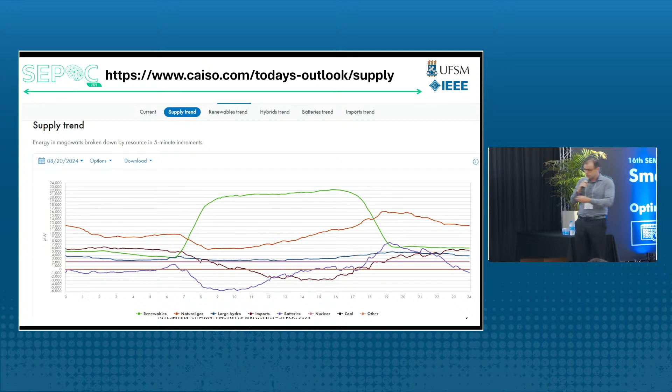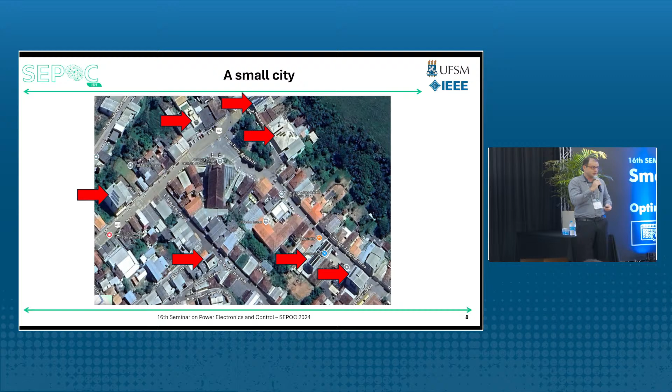What does this mean for us? General electrical engineering guys don't work with solar panels. They work with power electronics converters. But if you have a solar panel, this means that you have an inverter there. You have a power electronic device there. And this is in Santa Maria, in my city, in all the cities of Brazil; you can find a lot of solar panels. This means that we have a lot of power electronics converters spread around Brazil. And this is very good for us, because we can start to think about this.

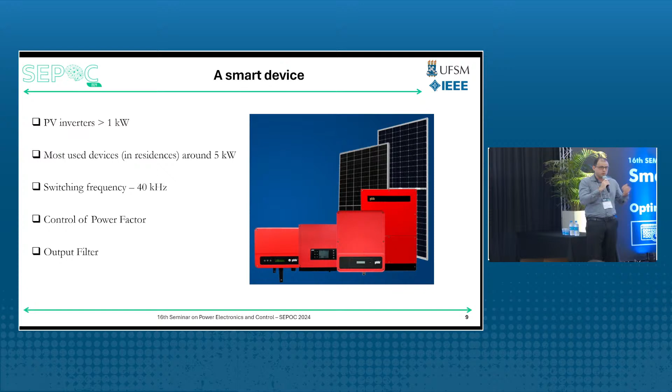And this device works at very high frequency compared with the traditional power system, because our grid is 60 hertz, and the device is switching at 40 kilohertz. So this means a lot of things for us that I'd like to introduce here today, if you don't work on this topic. And the control generally works with a power factor equal to 1, or very close to 1. And this is the most important thing there: you have a power factor control, and you have an active power control that is controlling how much energy you can extract from the PV panels.

And inside this converter, I take an example of a small one that has two stages, a DC-DC stage and a DC-AC stage. And inside this, there are the main characteristics: the MPPT, VDC control, protections, synchronization. For all of the converters, here in Santa Maria you have a laboratory that can certify this type of test. It's very amazing there. I went today with Professor Lucas.

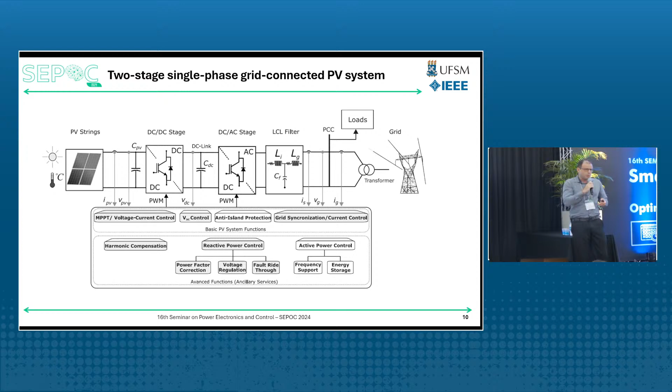And also, you can do other things. You can do harmonic compensation, reactive power control, active power control. Today, we cannot do active power control because most of the systems don't have a battery connected together with the inverter. But in the future, maybe in 5 years, most of them will start to have the opportunity to also connect a battery. Of course, there are many opportunities to buy this type of device, but it's not the best seller today.

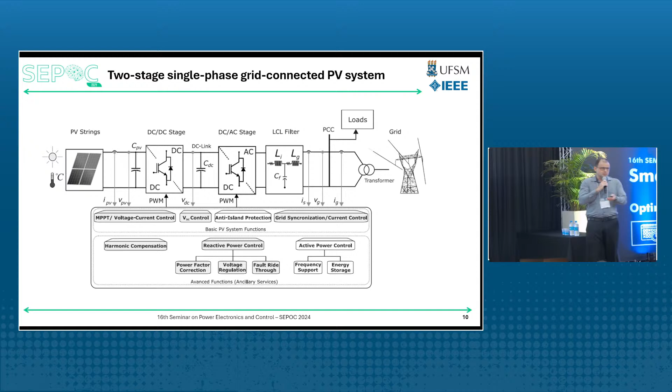So I'd like to do a joke with you. If you don't work with power electronics, I will ask the guys here, please, to play the first music.

So thank you for the first video. And now, we have Professor Lucas who is a pianist, so he can listen very well. I don't know if all of you can play this, but this guy plays. I cannot play what he did. So I'm not saying that he plays bad. I cannot do what he does. I don't understand anything about music. And this works very well.

You can listen to the music. You can see what song it is. It's a very beautiful song. Okay, it's working. You can use this type of device to play songs. But now I'd like to show you another device that also plays songs. So please put the second video.

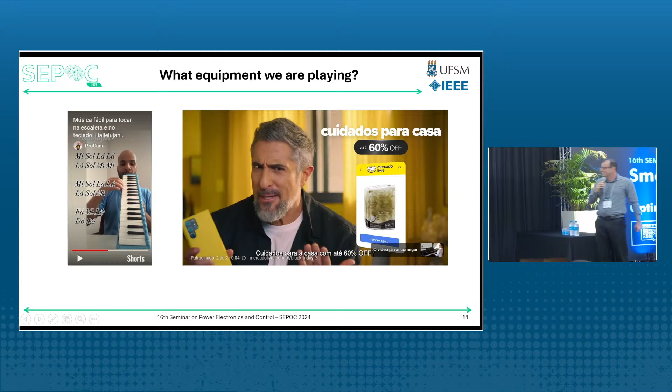It's the same song. I think that's okay. It's okay. Why do I show these two songs to you? Both are playing the same song. So if you understand music, you know that all of these are frequencies. So the notes, they have frequencies. So if you'd like to play a song, you need to understand the frequencies.

But the quality of the device can change the way that it impacts people. So when we have a power electronic device, we are talking about a very nice device. And which type of song are we playing today? I don't like to say bad things about the power devices today, because they do the job. They are doing very well. But I'd like to say that for the future, we can continue playing the same device, or we can change the device a bit and improve the song.

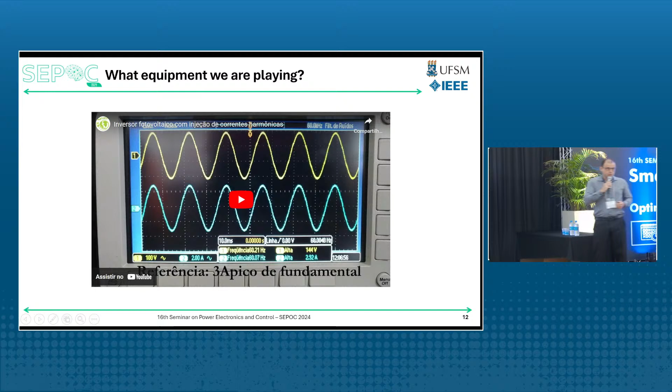So next slide, let me put it here. So this one we did in our laboratory in GESEP. So if you can play, please.

Okay. So we take a commercial power device from PHB Brazil, and we change the software of the device, and we are controlling the current, 2 amps, 3 amps of fundamental, 4 amps. And now we start to put in a third harmonic. So we are asking the device to inject a third harmonic, increase this one. After we put fundamental plus third harmonic, increase the third harmonic, so you can see that the waveform is very bad now. Increase a bit more.

So we change the frequency. We change the way that the device is playing. And we can do this. We didn't change anything in the converter. We only changed the software. So it's the same current sensor, the same voltage sensor, the same processor. And we changed the song that was playing there. Most of us cannot hear 60 hertz or 300 hertz, but it's a frequency. So let me show, can I?

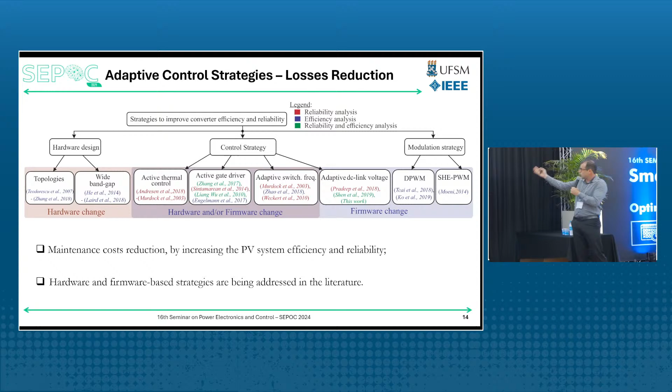So the first thing that I'd like to show you is about improving the losses. So many people like to reduce the losses. And how can we do this? There are a lot of ways to do this. We can change the hardware. We can change the hardware and the firmware. We can change only the firmware.

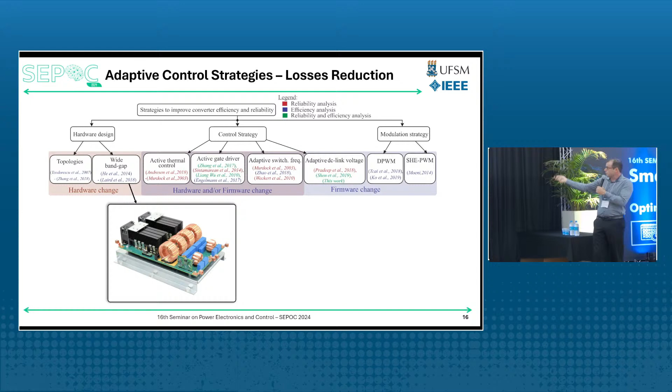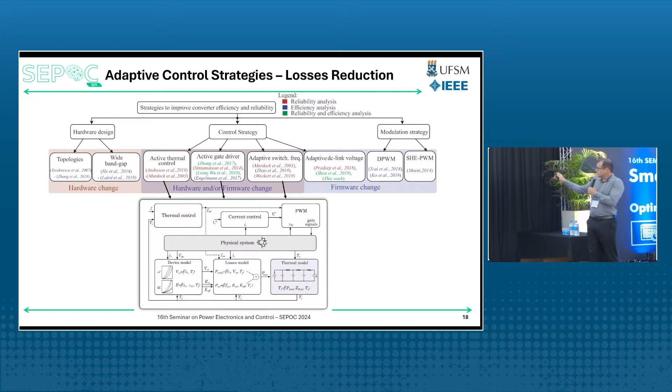So here there are some topologies that you can try. What's the best one? You can try wide band gap devices. You can change the modulation to a discontinuous modulation. Also, you can change some characteristics of the thermal conditions. And we are proposing the first part here. Why can't we change the DC voltage of the converter? Because why do you need a DC bus in the converter? Because you'd like to inject current into the grid.

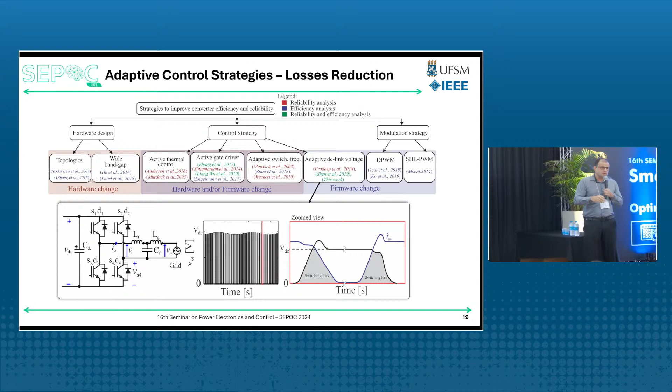But if the current is very small, for example, in the beginning of the day, you don't have a lot of sun. So the current that you are injecting is very small. In the beginning and in the end of the day, the current is very small. So why can't you change the voltage reference? Why would we like to change the voltage reference? Because the switching losses are related to the DC voltage. So if you reduce the DC voltage, when you are switching, you are reducing the losses. So this was the strategy behind this.

Here there is a small equation to show the voltage that you'd like to synthesize using the converter. Of course, that is impacted by the impedance of the grid, the output impedance of the converter, and the grid voltage. So in the first case, the grid voltage is V0, and you need to synthesize Vs.

If, for example, the grid voltage increases, and this can happen and it's normal, for example a 10% increase in some conditions, at least in rural areas it is very common for the voltage to vary during the day. So if the grid voltage increases, you also need to increase your synthesized voltage. In this situation, you need to increase your DC bus.

This way, you need to look at the standards. What is the worst case? Because when the grid voltage goes down, it's better, because you can reduce the DC link a little more. But you need to consider that if the grid voltage decreases, maybe you need to increase the current to keep the power. So it's not so straightforward to analyze this way.

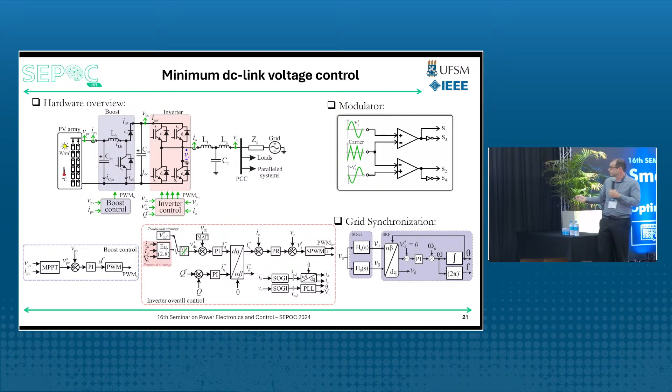Here there is another case where we create an index called k, where k can be equal to 1. If k is equal to 1, you are in the, let's say, traditional case. And if k is more than 1 or less than 1, you are doing an adaptive control.

And here is equation 2.8. I will not show how everything is calculated, but you can see that it depends on some parameters. Some of them are constant, like the grid frequency, the resistance and the inductance; they generally will not change. But the grid voltage and the currents ID and IQ that you are injecting will change during the day. Okay, so this was the first case.

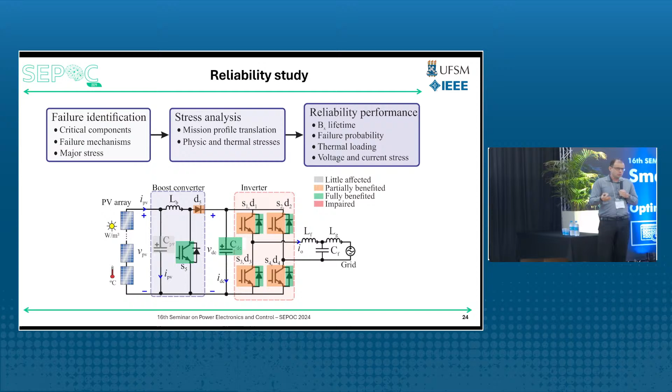And we wanted to understand: okay, I can do this, it works very well, but what is the impact on the lifetime of the converter? Will I increase or decrease the lifetime, because the voltage can decrease here in the DC bus? How will the elements, at least the semiconductors and the capacitors, feel this change? So we did a lot of tests. When we talk about lifetime, there are a lot of methodologies you can use during the study. So I will show you one of them.

But our group did a very good job, and they could implement the equation that I showed you, and in real time we can calculate the voltage that I want in the DC bus and control it. And here is a base case where in red we have the traditional one, and in blue our proposed strategy. As you can see, we made some modifications here. For example, we did a step of reactive power.

Why do I do this? Because I want to see how the control responds. Here it's a small step, because it's controlling the fixed current, but you can see that to inject reactive power into the system, I need a higher DC link. And whether it is inductive or capacitive, observe that the DC link can decrease a bit.

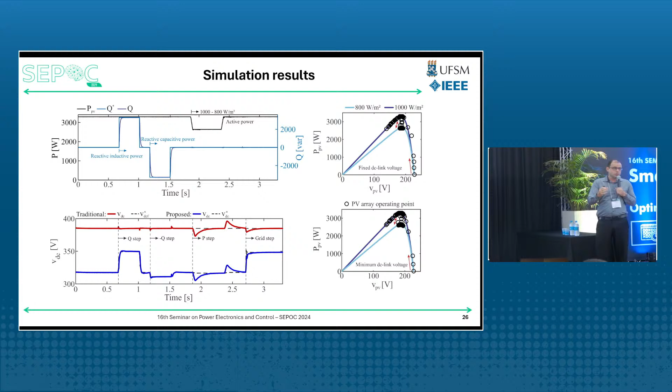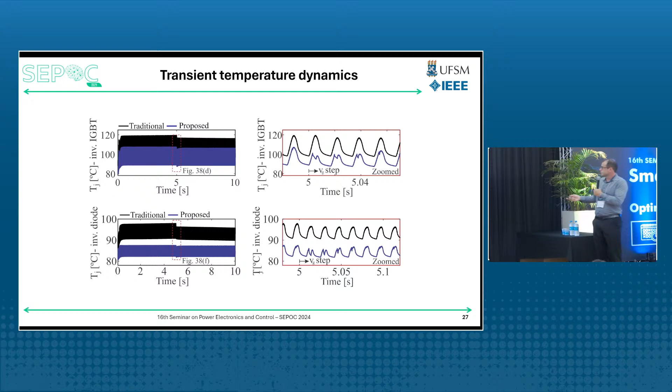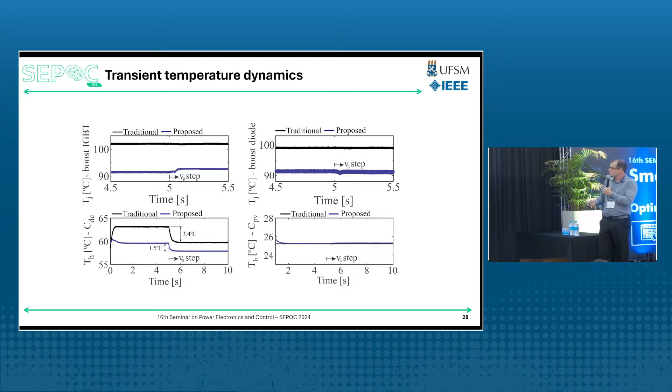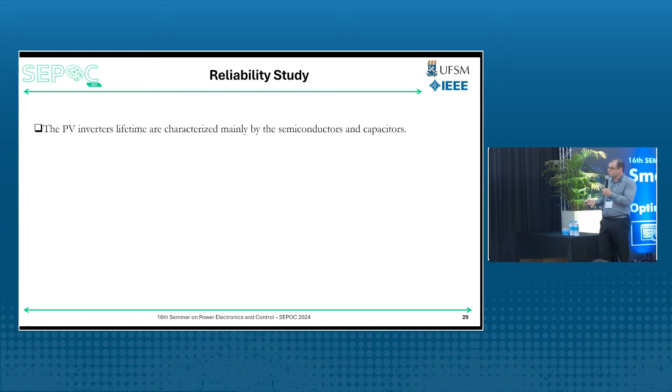The reliability study, the PV inverter lifetime are characterized mainly by the semiconductors and capacitors. So I will show you here a figure, a very traditional one, where what's the big failures that happen in a PV inverter? Are the power device and the capacitors. Of course there are other important failures like gate drives, but in this study we didn't have a methodology to understand how the gate drives will fail.

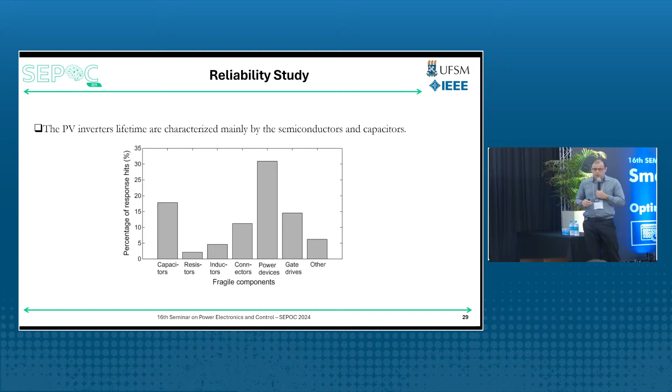But for the capacitor and for the power device, there is a lot of methodology that can be used in this direction. I don't like to spend a lot of time on how this is done. So there is some classical strategy where we need basically a mission profile. So the most important thing here to do this type of study is that you need a mission profile for ambient temperature, the solar irradiance, and grid voltage.

And also this means that depending on the solar irradiance and the temperature in the environment, maybe the same result done for Rio Grande do Sul can be totally different from Minas Gerais. Maybe inside the state, in one place you can have one result, in another city you can have different results. So it's not so easy to conclude based on reliability, but it gives you some ideas. Of course if you improve here, you will improve also in other places, but maybe not in the same magnitude.

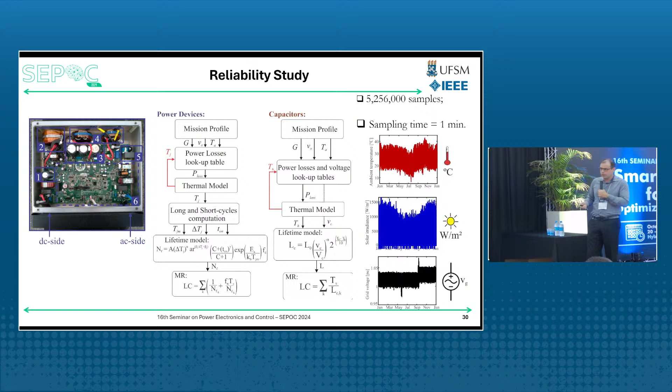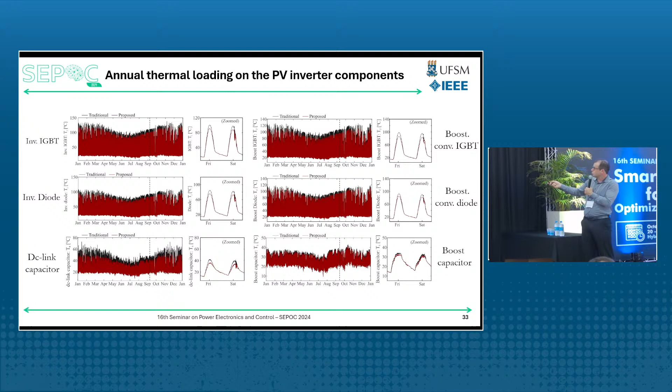So we create this type of power losses lookup tables, thermal model. We analyze long and short cycles. Also, after, we need to use a Monte Carlo simulation because inside the data sheet of the device, there are some parameters that can change 10%, 5%. So you can understand how this is done looking at the data sheet, and they will give you some directions on how much this power electronic device can change. And based on this, we can see the profile of current, or of temperature, in the IGBT, diode, DC link, everything.

And concluding this first part, here is the conclusion. Our proposed strategy can increase the lifetime B10 from 18.1 to 29.4 years. This is a methodology where the B10 says how much time it will take for 10% of the samples to fail. Of course we are not saying that the PV inverter will work for 29 years. At least for me, I don't look for this number and believe in this number, because this is a comparison between two things.

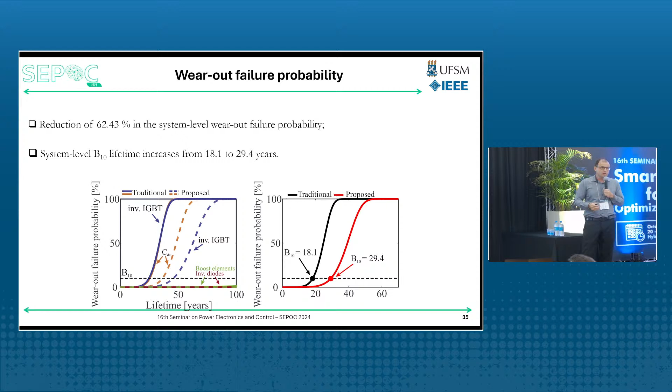There are a lot of other things that were not inserted here, like the gate drives, other steps that we didn't add in this study. But the good thing, in my way of thinking, is that you can see based on statistics, comparing both strategies with the same conditions, that using the proposed strategy, you can increase the lifetime of the power electronic device. Okay, so I finish here my first case.

Now I'd like to show you the second case, where we use this inverter to provide an ancillary service. This is a topic that is growing a lot nowadays because, like I showed you in the beginning, this device is very smart. So you can use it to do other things. And I will show in this next case the reactive power compensation.

The first question is, why would I like to do an ancillary service? For photovoltaic systems, I can answer you very easily. Because in general, in our case, for example, you have sun between 6 a.m. and 6 p.m. Maybe in one month or another, this can change a bit. This way, you have a power electronic device in your house or in the industry that is in standby mode approximately 70% of the time.

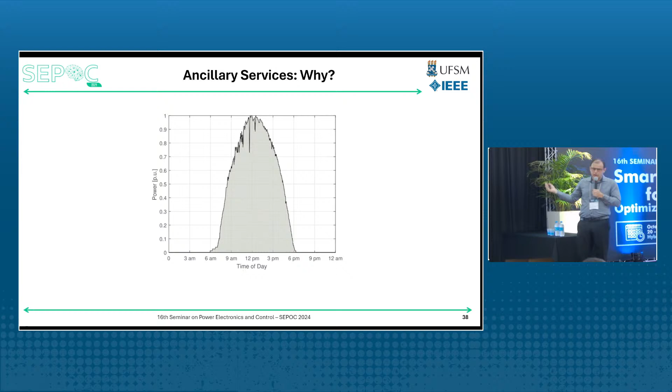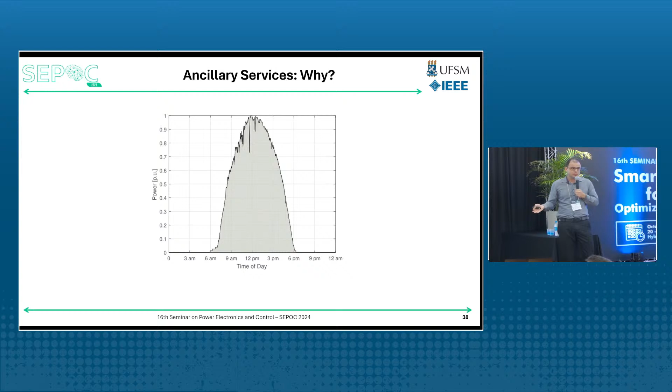Because in some parts of the day, you have a margin of power here that you are not using because there is not enough sun. In this case, we take the total area of the square and remove the area of the irradiance, and this area here is around 33%. So you have almost 70% of available power that can be used for other things.

So we choose the PV plant plus one industrial system. Why we choose this study case? Because, for example, for homes in Brazil, we don't pay for reactive power. You can take a lot of motors in your house with a power factor 0.8, and no one cares about that. But for the industry, they need to pay at the end of the month a quantity of the reactive power if it is below 0.92.

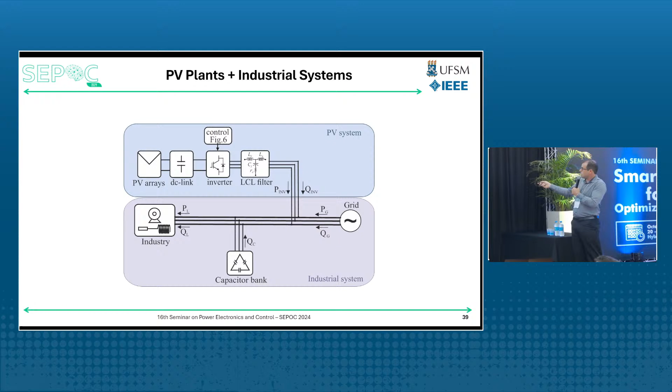And I like to show you other problems when you have a PV system. So here you have the industry with the generator, they have a lot of motors, and you add a PV system to decrease your bill, decrease your electricity bill. So many industries in Brazil did this. What they didn't know, because people didn't tell them, because many of the people that install PV systems didn't know about this.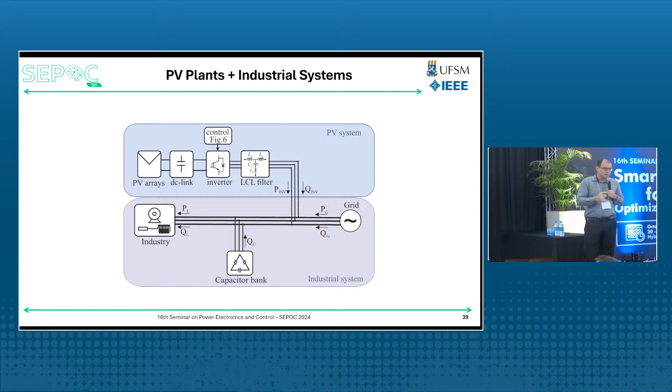In industries, they have a lot of capacitor banks. Why they use capacitor banks? To correct the power factor. What's the problem of capacitor banks? That they have steps. So they have some quantities that are defined, and they switch the capacitor. And sometimes you cannot change this switch in a very fast way, maybe in minutes or seconds, but not in milliseconds. For sure, not in milliseconds. Maybe in minutes you can, because the switch will burn if you do this very many times during the day.

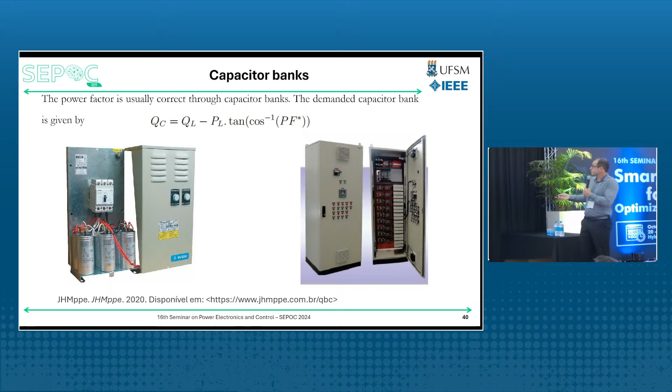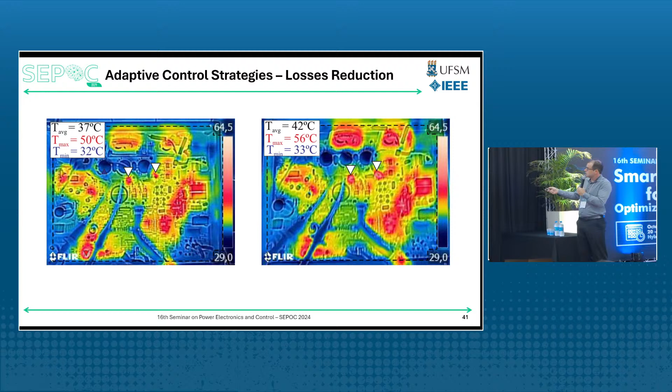Here is one example that I'm showing that we are taking the PV inverter from PHB, inject only active power, and now we like to inject also reactive power. You can see that, for example, in this part and this part, the average temperature here is 37 degrees, and here is 42. What does this mean? That if you like to do more things, there is a price. The price is in lifetime.

In the first case, I show you that it's possible to reduce the time or increase the time. But in this case, I'm saying to you, you need to pay a price. If you like to inject reactive power in the system, you need to pay a price. The price here we can see in temperature, but also we need to do a lifetime study to understand how many years I will reduce my system.

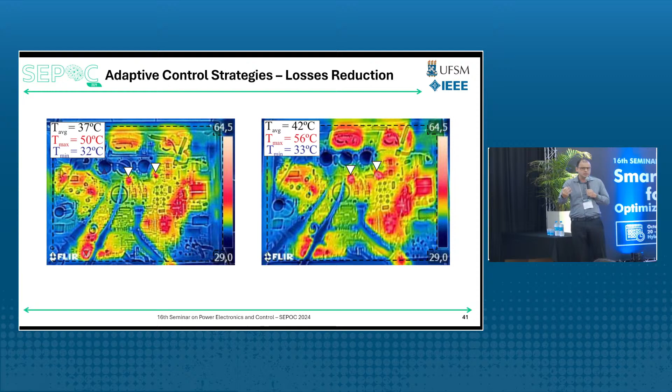And in terms of control, you are not doing a lot of modifications. You are working only here. All the control loops will be the same, the gains, but you are changing, like instead of, for example, I have 0 here, I like to have 0 in the grid of reactive power. Or maybe in some cases, for the biggest inverters, if the voltage decreases, they need to increase the reactive power. So there are some low voltage ride-through curves that they need to follow. At least wind turbines, this type of converter, they need to follow the reference of a low voltage ride-through. But here, instead of having a 0 here, why can't I have a reference?

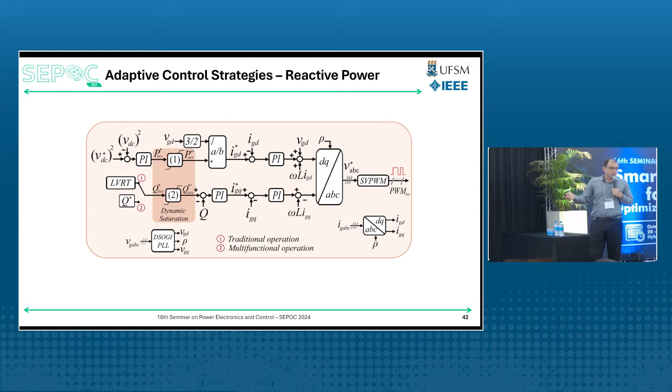But you need to take care, because you need to inject the active power coming from the PV panels, and now you like to inject reactive power. But the inverter has a limit. So it cannot do what you like. There is a limit that you need to respect, okay?

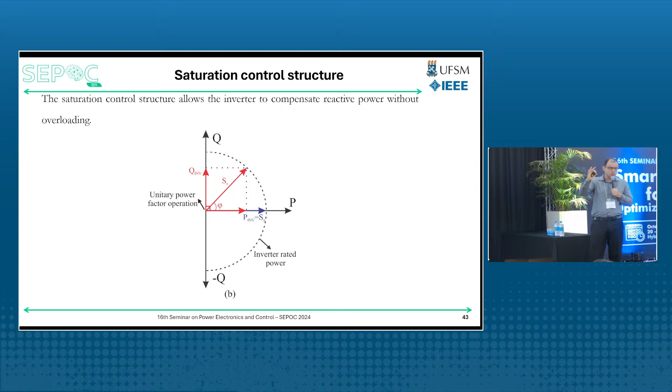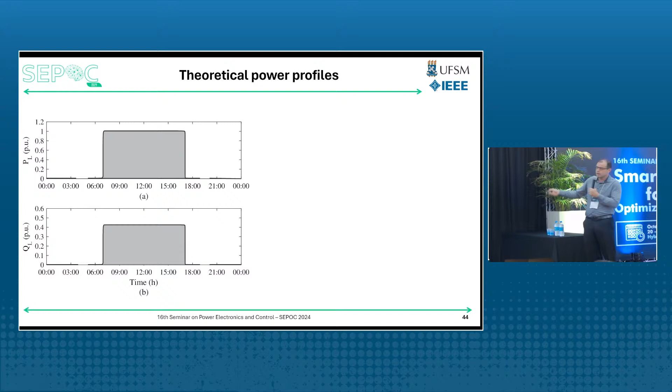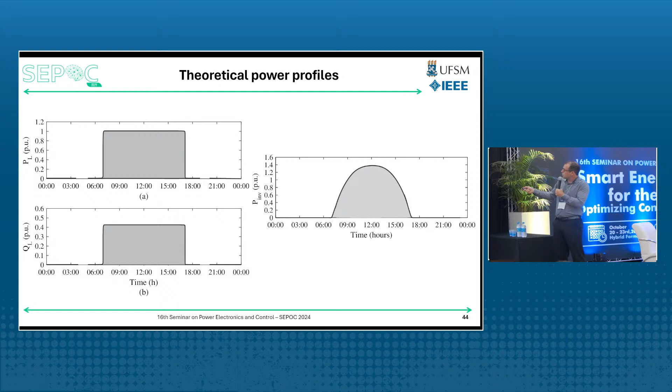And I like to show you a problem that many people don't know in Brazil, in the industry that installed the PV system. Imagine the situation, only a hypothetical one, okay? You have your load, active power load here, 1 PU, and your motors in the industry are taking maybe 0.4 PU of reactive power. And you add a PV system. When you add a PV system, what happens in the middle of the day? You are injecting current in the grid. But there is something special, because this area here is equal to this area. Because of this, here is a bit more, 1.4.

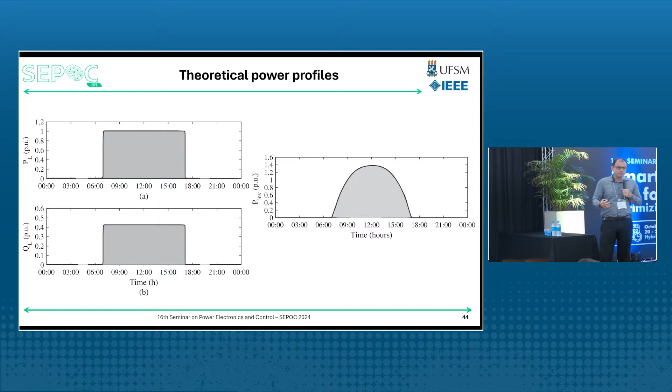There are some special moments of the day when, for example, this is equal to 1 PU, here is equal to 1 PU. What's the active power from the grid? 0. So if the active power from the grid is 0, and you have only reactive power, what is your power factor? This is very complicated because you need to have a capacitor bank that is able to compensate all this reactive power. Because at some moment it's 0, so you need to pay the bill at the end of the month.

And more, because I like to show this curve. This is the energy that you need. Like I told you, in some moments of the day, you need to have the same quantity of reactive power in your capacitor bank, and in this moment you are injecting a lot. When we published this paper about this topic, we called it that, because there is a very famous curve in power systems they call the duck curve. And we call this one the cat curve, because people say that if we put an eye here and the other eye here, it can look like a cat. So we call it the cat curve.

And here we can see what is happening when you have the installation of a PV system. If you don't control your reactive power, if you don't have capacitor banks, you will start to pay a lot of reactive power in your bill.

In our mind, why can't I use the PV system to compensate also for reactive power? So I can deliver two services for the customer. In the same converter, I can deliver active power and also reactive power.

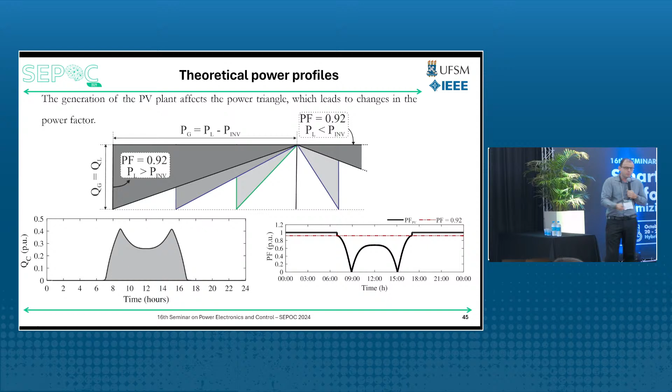In this case, we can design a capacitor bank to have a very controlled power factor close to the reference. But it is almost impossible to keep this all the time, because in these moments the variations of the sun are very fast, and you don't have a step in your capacitor bank able to follow small modifications. So in some cases, even with a capacitor bank, you can have problems controlling exactly the reference.

Because we can see that this is like a discrete operation. On the other side, with the power electronic device, you can have a continuous operation. If you like to put 1.1, you can put it. If you like to put 1.2, you can put it. And the other important thing: we are talking about 60 Hertz, because reactive power is 60 Hertz. So it's very easy for a converter that is switching at 400 kilohertz to play a signal that is 60 Hertz. It's not so difficult to do this.

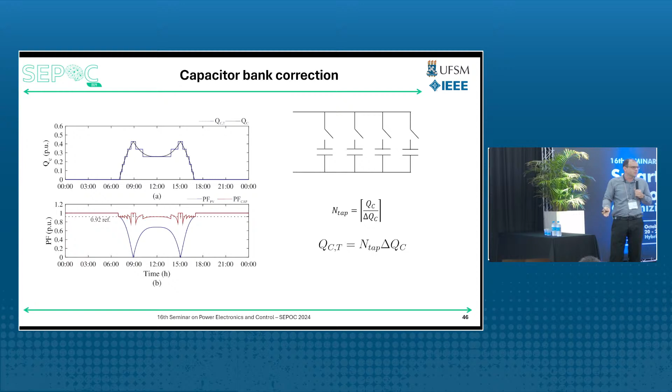Look how fast this is, if you don't normally work in this area. In this moment here, within 1 second, I asked for the reactive power to go from 0 to 900 vars. Look at the transient here. It's very, very fast for a modification that is quite abrupt, because the inverter is 1.5 kilowatts, and I am asking for almost more than 50% variation. And this is very, very easy, almost no transient, and easy to do.

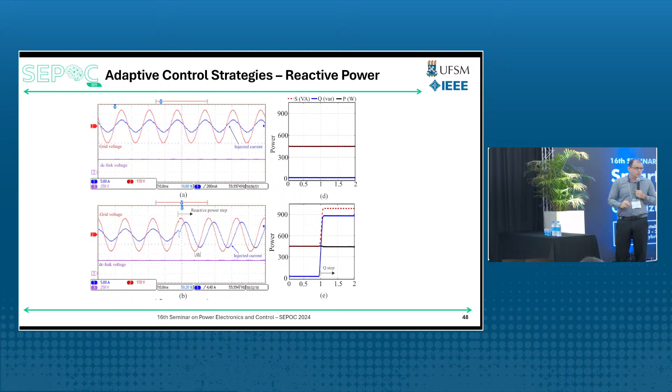And here we start to think about how can we convince people to buy this idea? So instead of buying a converter of, for example, 1.5 kilowatts, why not buy one converter of 1.8? You will not increase the converter size so much. I don't know if you know, but some companies sell a product of, for example, 2 kilowatts, and they have a similar product of 4 kilowatts, and they only change the software.

It's like the oscilloscope: they say, do you like 100 megahertz? This is the price. If you like 200 megahertz, I can send you a key, you put the key in, and it starts to work at 200 megahertz. I think the same can be done with power devices, because most companies have similar products that only change some software inside the device.

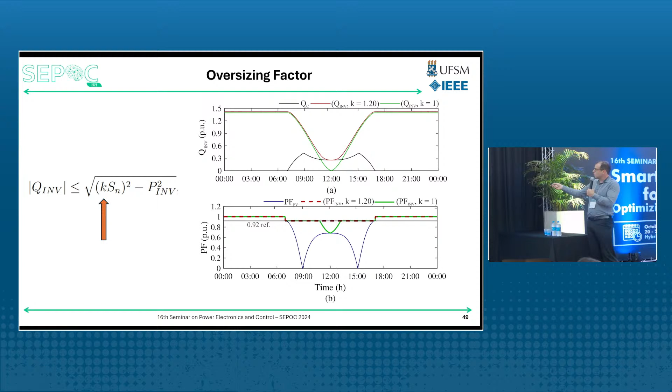So this is the idea: you can upgrade your converter and operate with control of the reactive power. Based on this, we did a lifetime study where we took a profile and did a Monte Carlo simulation.

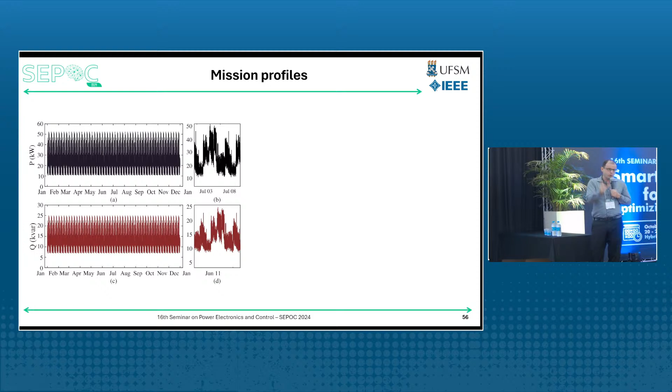So here is the mission profile of active power. We take this profile of a company working in Viçosa. It's only one week of mission profile, but we reproduce it for the whole year to have the complete mission profile. We didn't measure for one year, only for one week, and we reproduce this for active and reactive power, so we need the solar irradiance and ambient temperature.

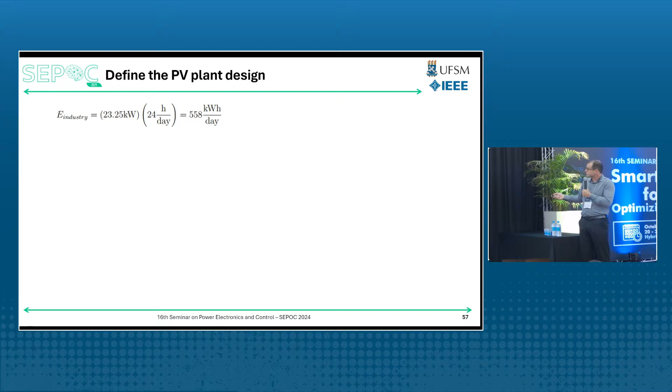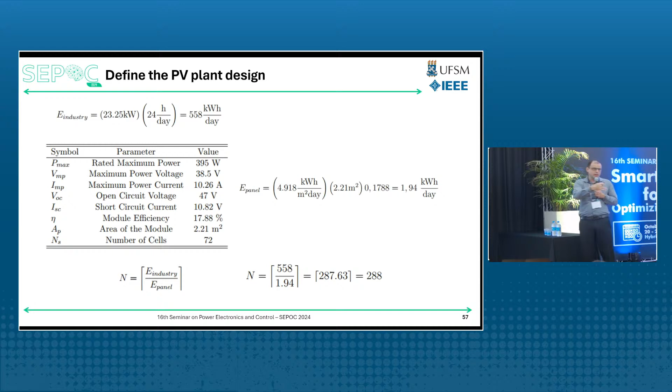The energy that this industry spends is 558 kilowatt hours per day. We calculated, based on this PV panel, how the production of this PV panel is for Viçosa, and then we divide and find the number of panels necessary to produce the active power. This is the active power produced for this inverter.

We have a tax here of 0.08 dollars per kilowatt hour. We evaluated how capacitor banks can solve this problem, for different power factors, and also the PV inverter cost if we oversize the converter.

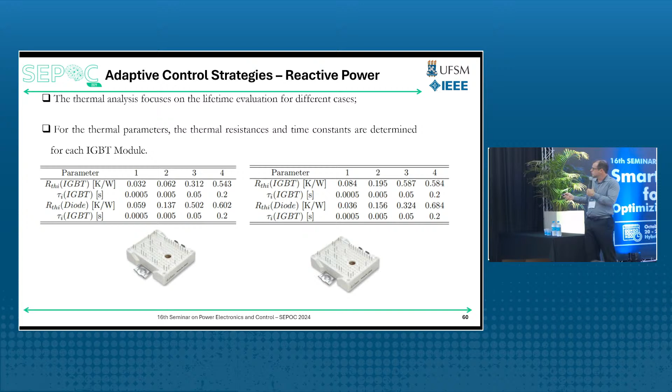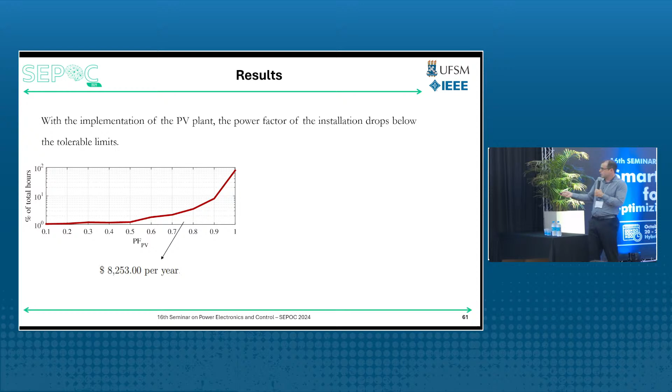Here are some details, I don't need to show this, I think that's okay. Here's a case where if I only add the PV panel in this industry, the bill will increase $8,253 per year, because I didn't compensate the excess reactive power.

I can also put a capacitor bank, and part of the time, look here, more than 90% of the time you are okay with the capacitor bank. But sometimes it's not possible to control.

So another solution: instead of designing a capacitor bank for 0.92, why not design the power factor capacitor bank for 0.93 or 0.96? We see that if we design for 0.93, we can keep the power factor almost during all the time.

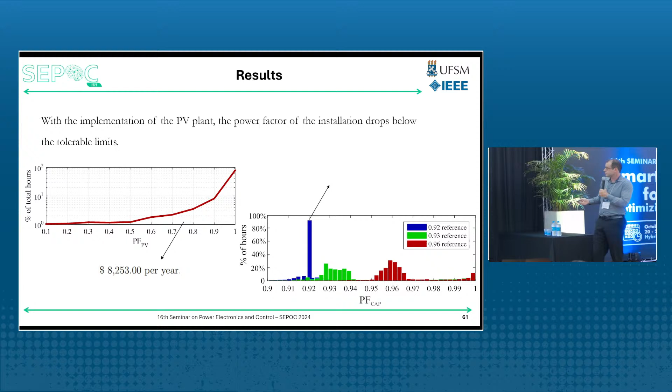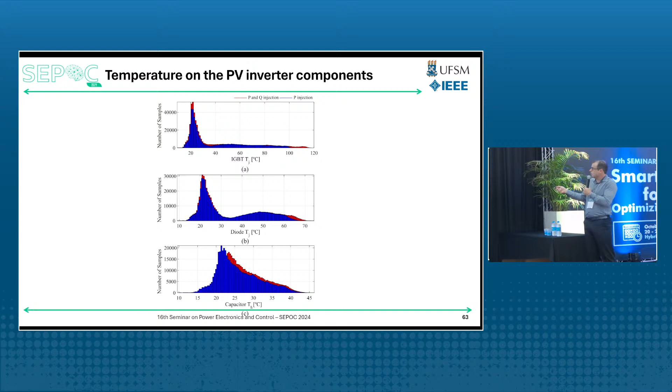You can see that when you are injecting active and reactive power, part of the time your temperature increases. Here you can see that you work around above 100 degrees Celsius. And here is the conclusion of this study.

All the devices here, we are analyzing what happens if I oversize the inverter. We also analyze if I increase the DC-link capacitor. In this case, we change the capacitor, because we found that you can find some problems in the capacitor if it's working this way.

It can get hotter. So we also propose some strategies where you change the capacitor, so you can increase the lifetime from 28.6 to 32.4 years, okay?

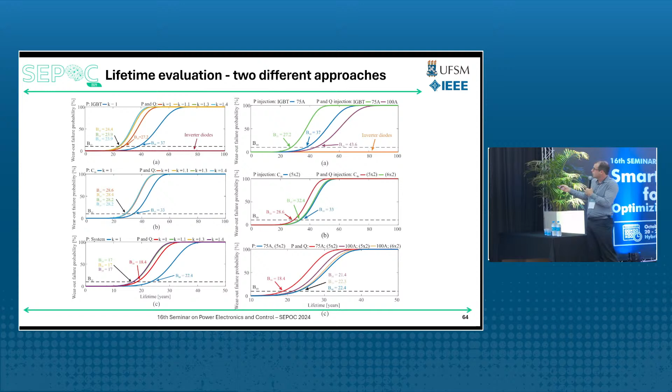If you change the IGBT, the traditional case is 75 amps. If you put in the strategy - because this is the traditional case where you inject only active power - if I use the same case, my lifetime will decrease from 37 to 27.

But if I increase the switch's capacity, or the current capacity of the switch, you can increase the lifetime of the converter. So there is a lot of modification that you can also do to improve the lifetime.

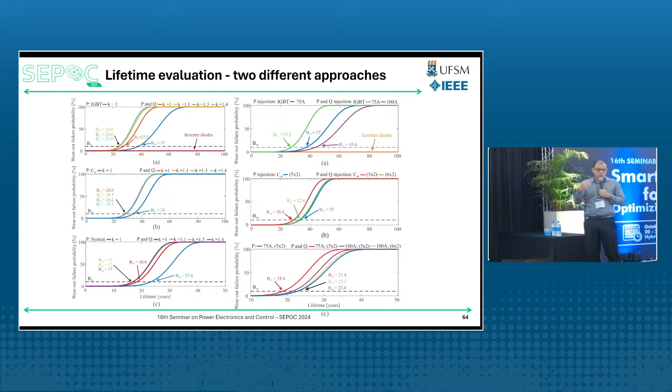So, conclusions here: the power factor of an industry plant drops with the inclusion of a PV system. Capacitor banks and multifunctional inverters can be used for correction. We show capacitor bank advantages and drawbacks here, and also some drawbacks and advantages of PV inverters.

I go now for the last case. Let me see here. I'd like to talk a bit more about harmonics, because when you talk about harmonics, you are increasing the frequencies - you are not at 60 Hertz.

Here also, all of these are one traditional strategy. What I'd like to include here: now I'd like that my converter, besides the fundamental current, also connects one additional current here.

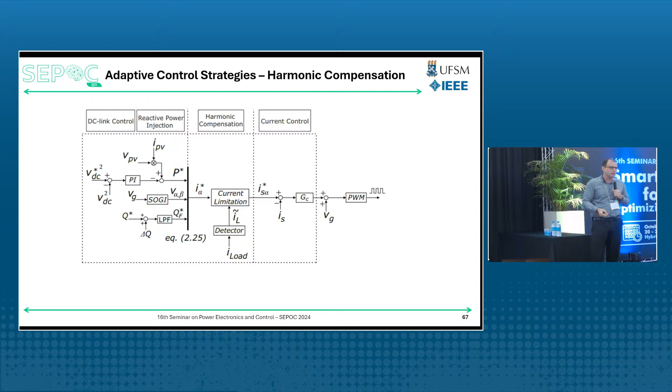I will tell you, convincing people by talking about harmonics is not so easy. With reactive power we found a way, because we can show the industry that the bill will change. But when you tell people that the motors will work better because you improve the harmonics, the THD, at least until today, I haven't found good arguments or good ideas to convince people who are not power electronics or power engineers that this is good.

But I continue talking. We are using here a traditional resonant controller, okay? In this case, we did a strategy using a traditional structure to detect the fundamental components, so we measure the current of the industry or the current of the load.

We pass for one PLL, but for the current, we can detect the fundamental 60 Hertz component, and we take the original signal with all the components and remove from it the 60 Hertz component we detected. So here is only the garbage, let's say, because it starts from 2 to n. We like to see if there is gold in the garbage.

So we take this signal and pass it again into a harmonic detector. Because what is the most important thing? People look for THD. How is THD calculated? It's based on the current squared, and you sum this. So if you like to reduce the THD, the best way is to reduce the highest component. If you can remove the highest component, you're doing the best job possible. After that, if you need to choose, you choose the second highest component. And this is the case.

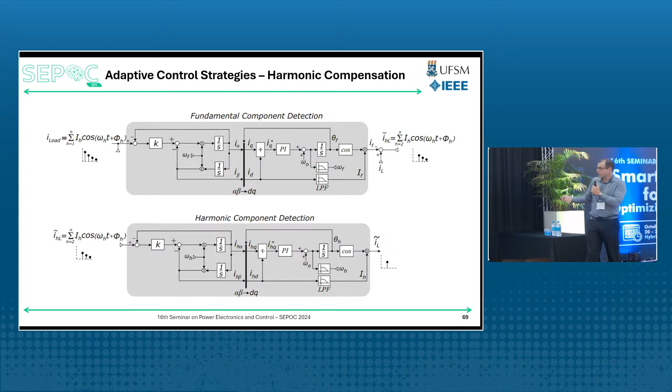So we did some structure that I can show here. How many stages do you like? I like to remove only the first 2 most important components.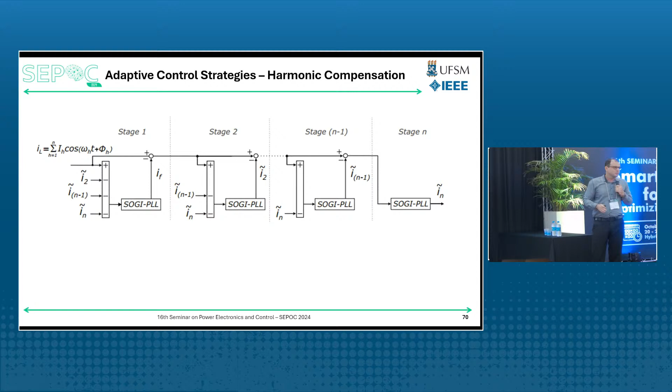This strategy has a limitation, because when we use this type of SOGI adaptive control, there is an attenuation in other frequencies. So if I am here at, for example, 60 Hertz, my third harmonic or my fifth harmonic is attenuated. I'm not seeing the correct value, I'm seeing the value multiplied by this attenuation. This means that if the fifth harmonic increases, maybe only a bit, I cannot see that now the fifth harmonic is the highest component. So there is this trick here.

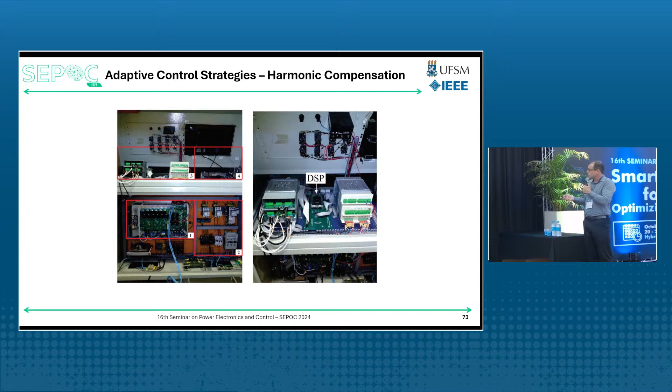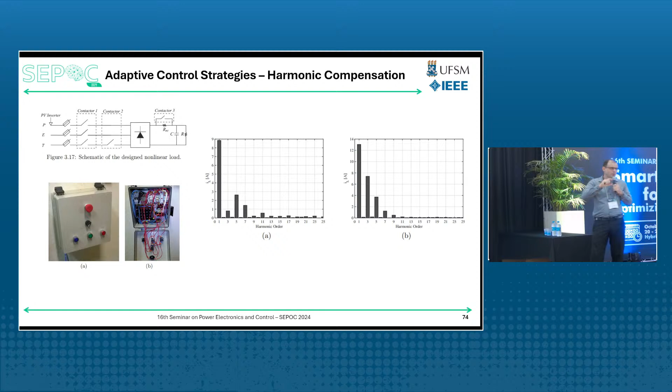We implemented this in Belo Horizonte, at UFMG. And here are the loads. We have a 3-phase rectifier that we work with sometimes like a 3-phase load, so we have the 5th and 7th components as the biggest ones. When we switch and open one phase, this becomes a single phase load, so here you can see third, fifth, seventh harmonics. We can change the load during the tests to see if our component compensates the highest component.

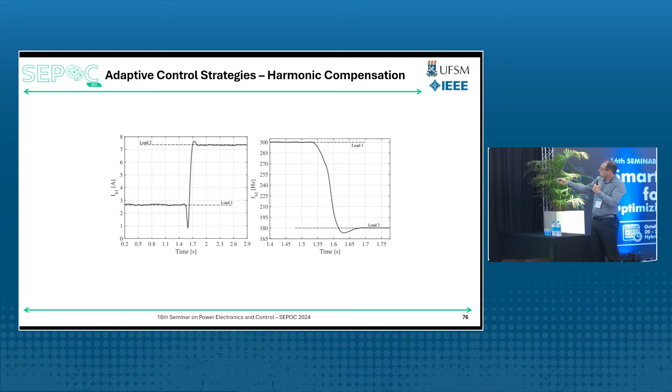Here is a case where I am in this condition and I change the load. So the fundamental, here at 60 Hertz, you can see measured in the DSP. This is not the fundamental, this is the highest harmonic, harmonic number one, not 60 Hertz but the highest component. In this case it's 300 Hertz, because my load is 3-phase, so here's the fifth harmonic. And when I change here, look, I go to load 2, the highest component is now the third harmonic. So I can show you that in a dynamic test, if the harmonic changes, my detector can find the highest component.

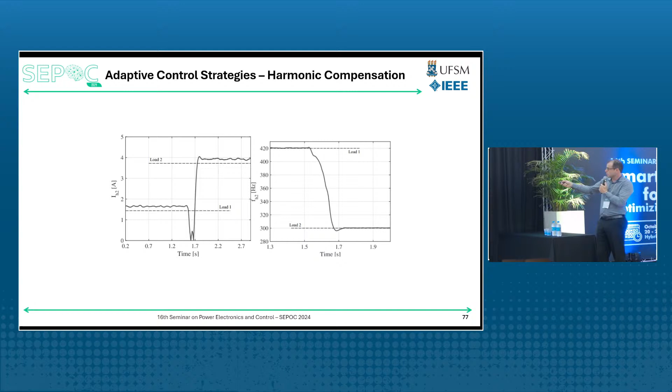Here is another test for the second highest component. We can also change this and detect it.

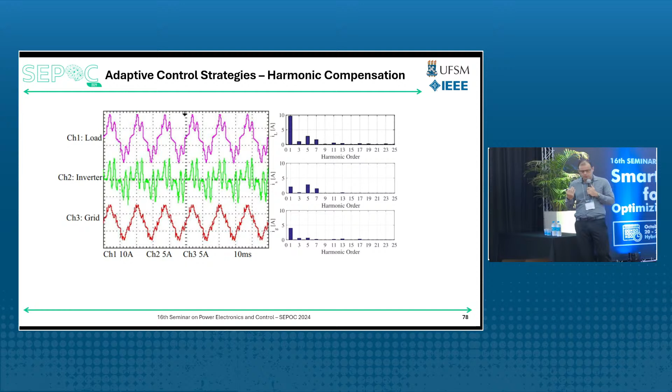But we cannot look at this like a bad thing. We need to look at it like the piano I showed you in the beginning—you are playing different songs, your device can do this. If you take a piano and play only 60 Hertz, okay, you can do it, you bought the piano. But if you like to play the other notes, you can create a lot of beautiful songs. And this one is with another load, with more third harmonic.

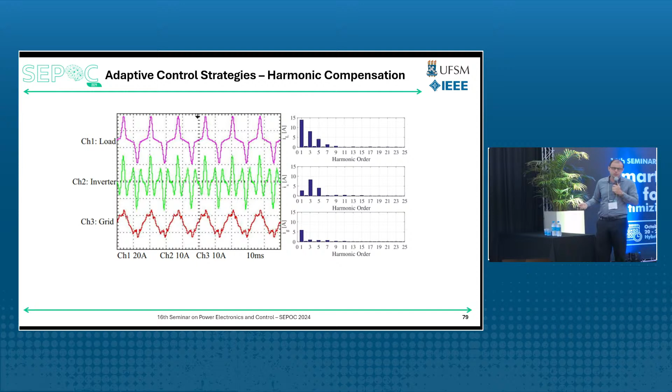When you change to third harmonic, you can see that the current changes the waveform. There is a detail here I'd like to show you: because I am asking to compensate one harmonic load, but in this case my first goal is this fundamental—I cannot forget that my goal is to inject the current produced by the PV panels at 60 Hertz. And now I'm also telling the inverter to inject this harmonic current.

But there is a saturation in the converter. This is the limit, in this case, of the current that I can inject.

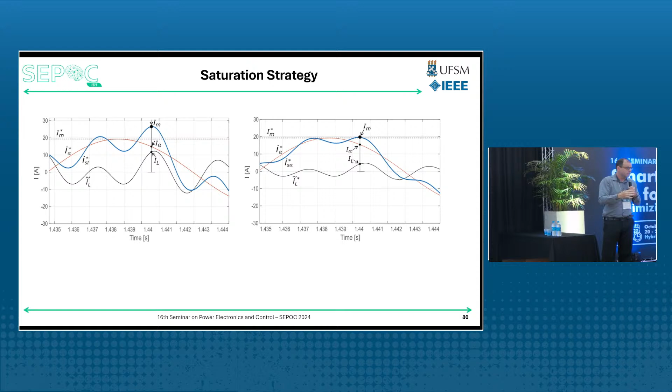If I ask the inverter to inject this current, it will not do it, because there is a saturation there. But if I put a saturation here, what is happening with the waveform? You start to produce harmonics in the waveform, because I made it like a square wave. I cut the wave. In this way, you need to have some strategies here to reduce this. But how to reduce one harmonic in a dynamic way? Because you almost need to take the wave that you'd like to inject and say, oh, I cannot inject all of this content because I don't have the capacity to do this. And we propose here in Lucas's PhD a strategy to detect, like a peak detector, how much harmonic I can inject. And here is one case.

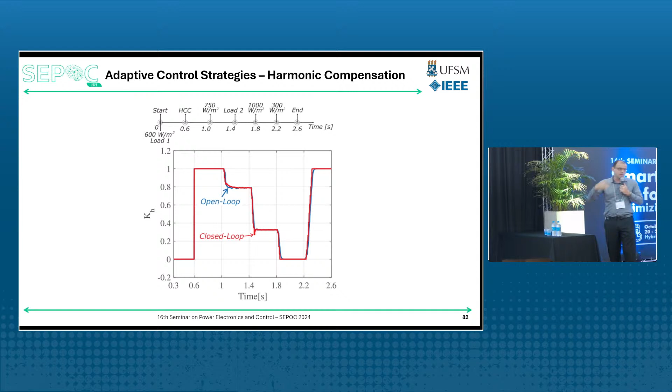You enable the harmonic compensation here, so in this first moment you can compensate 100%. In this case, you start to have some 750 watts per square meter. In this case, you cannot now compensate all the harmonics because part of the current is being used by the fundamental component. And if you put a load here, observe that it reduces a little more the capacity to compensate harmonics. And when you increase the irradiance to 1,000 watts per square meter, in this moment you can say, I cannot compensate anything in this moment. And after, when the irradiance decreases, you can return to a condition where you can continue using 100% of the inverter. And here's the case where you can see it by waveforms.

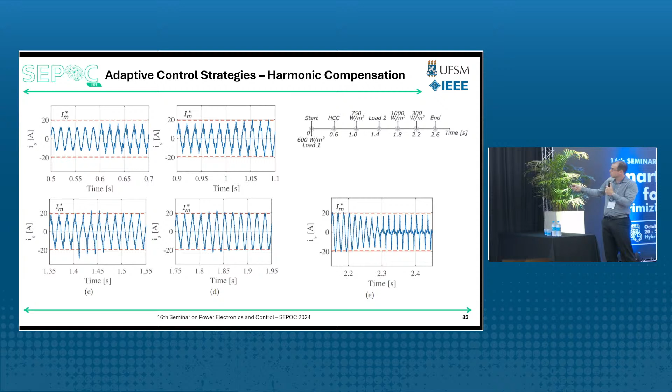You start here with only the fundamental component, increase the harmonic, it's okay. When you increase a bit more, okay, I am at the limit. Here in this moment, I arrive at the limit. And my compensator starts to work to avoid that I stay in this condition for a long time. And in some cycles, I come to a limited condition. And here also, because now the irradiance decreases so I can compensate more, I come to a place where I am not limited again to compensate the load. So I am compensating all the load and I am not saturating the converter.

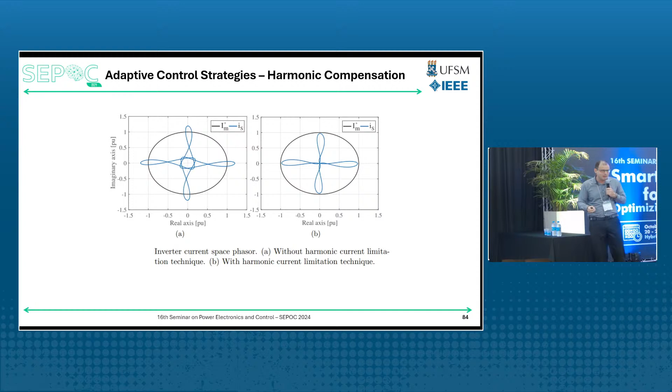And here you can see, some people like this type of figure to see that everything is inside the circle. And here you can see that before the saturation strategy, you are doing the job above the limits, and here you are limited inside the limits. So you are respecting the limit that the converter was designed for.

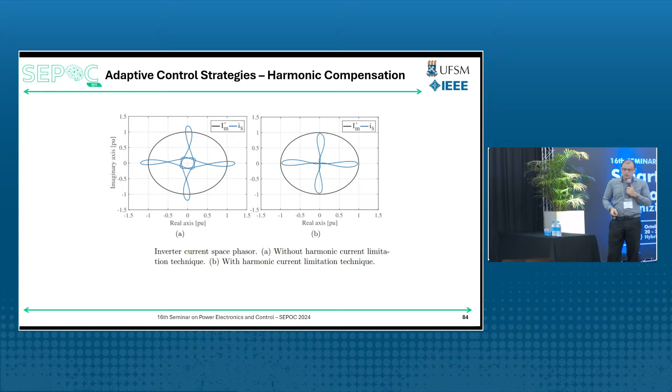And to conclude, in my case, I think that power electronics are a very powerful device. And we need to teach the other players about these capacities. Which players? Maybe you need to talk with the guys from the industry. Maybe you need to talk with guys from certification or the Brazilian government, because they don't know about this. Many electrical engineers don't know about this. And we need to be able to explain this. Like I told you, for reactive power, I think that I found some ways to talk. But harmonics are not so easy to talk about.

But in my mind, many things change the world. For example, I don't have Bitcoin, but I know that it is decentralized. There are many computers around the world working, doing the job, processing information, and taking decisions. In this way, why do we need centralized reactive power compensation? Why do we need everything centralized? The generation now is not centralized anymore. So the next step in my mind is the other services, like reactive power, and in the future, harmonics, if we start to have problems with that.